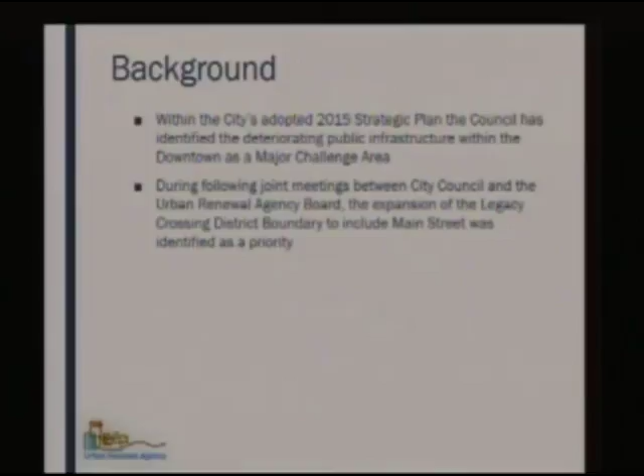After the adoption of that strategic plan in 2015, the council conducted two joint meetings with the Urban Renewal Agency Board of Directors or Board of Commissioners. In those joint meetings, expanding the Legacy Crossing District to include Main Street was identified as a priority for the agency to pursue.

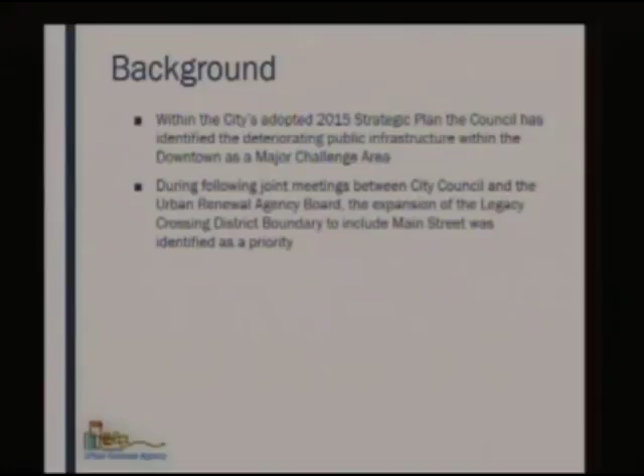Amending the boundary to expand and include that portion of Main Street in the downtown area would provide the opportunity for the agency to partner with the City of Moscow on future downtown streetscape and public infrastructure improvements.

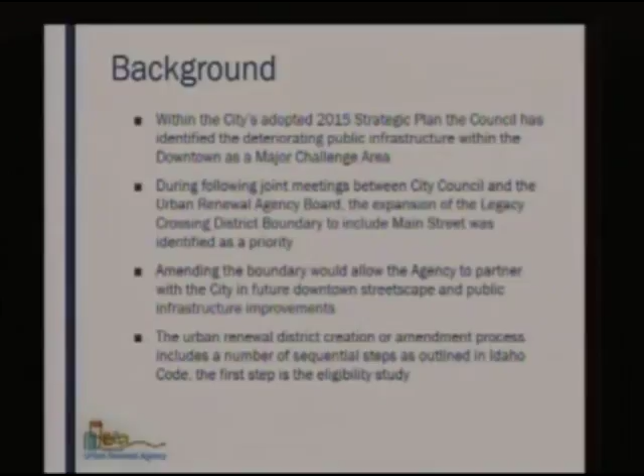The process of either creating or amending an urban renewal district includes a number of sequential steps. The first of those is completion of an eligibility study, which is what we're here this evening to discuss.

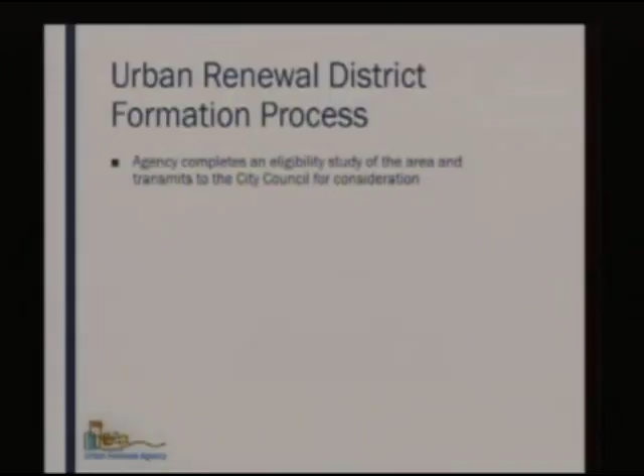As I mentioned, the formation process starts off with an eligibility study, and typically the Urban Renewal Agency, often responding to the direction or request of City Council, will complete the eligibility study for an area that the city is considering for an urban renewal project.

Once that eligibility study is complete, it would then be transmitted to the City Council, passed by resolution of the Board of the Urban Renewal Agency, then passed on for the Council's consideration.

The Council then considers the eligibility study, and if the Council concurs that the area meets the definition of a deteriorating area and is appropriate for an urban renewal project, the Council would approve the study and authorize creation of the district plan.

The agency then prepares the district plan, and when it's complete, approves the transmittal of that plan to the City Council by resolution of the agency for the Council's consideration.

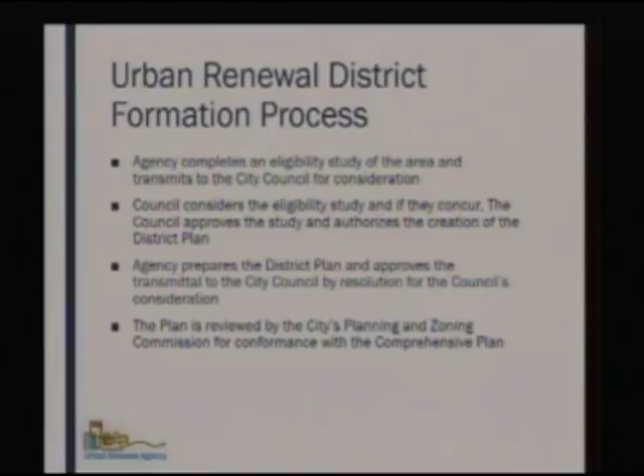Once the Council receives a plan or proposed amendment from the Urban Renewal Agency, the City Council refers it to the City's Planning and Zoning Commission, which is charged with reviewing the proposed plan or amendment for conformance with the City's adopted comprehensive plan.

Once the Council has received that recommendation, the City Council would consider the plan during a public hearing, and if approved, would approve it by ordinance, which formally creates the district and any associated tax revenue allocation area that may be associated with the project.

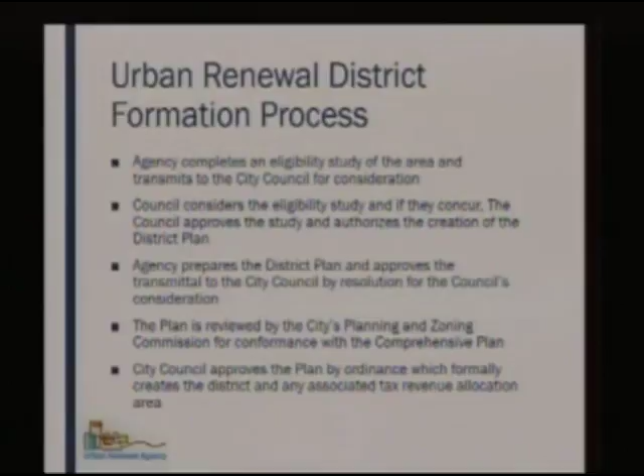So as I mentioned, this evening we are here looking at the very early stages of that process for amending Legacy with the eligibility study.

The study is intended to assess the project area to determine if conditions exist that would indicate the area is a deteriorated or deteriorating area. Those are two different but companion definitions in state statute, included in the appendix of the eligibility study you have this evening.

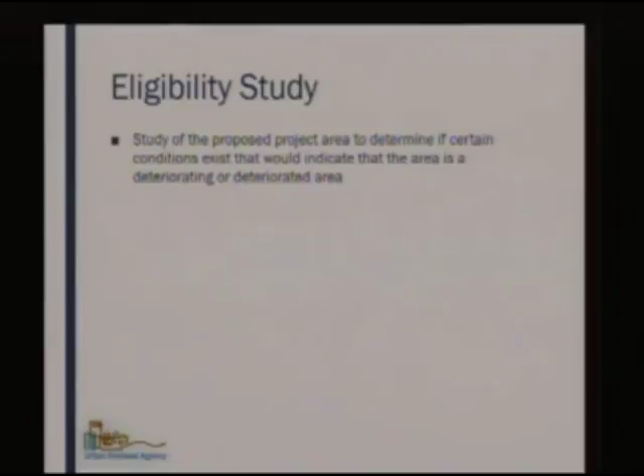Within those definitions, there are 10 specific criteria identified under Idaho Code, which assess the condition of both public and site improvements, structures, as well as other impediments to development—maybe street layout, lot configurations, or configurations of ownership that impede the development and redevelopment of a specific area.

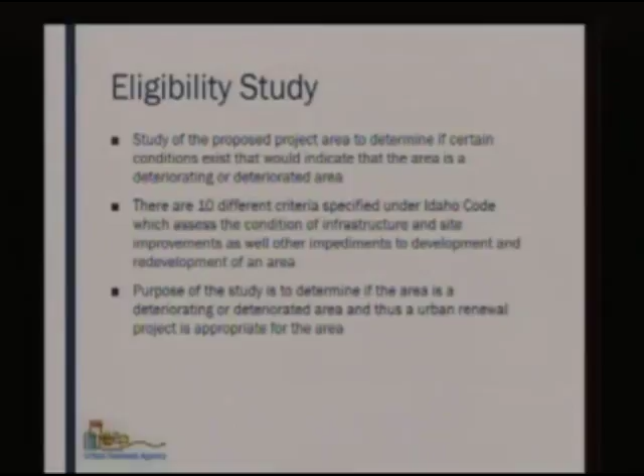As I mentioned before, the purpose is to determine whether the area meets the definition of a deteriorating or deteriorated area, and thus whether an urban renewal project is appropriate for that specific location within the community.

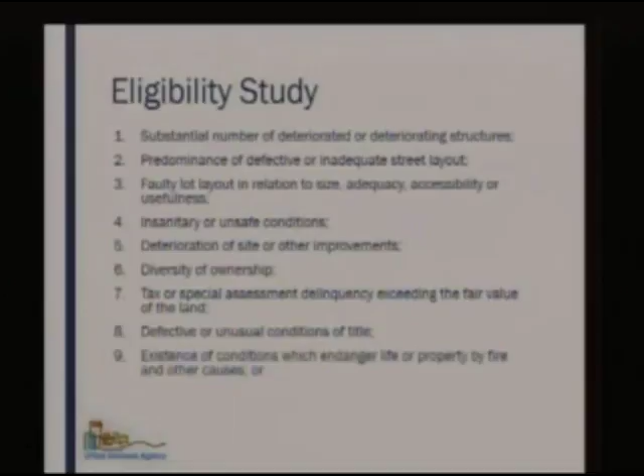So those 10 criteria start off with a substantial number of deteriorating or deteriorated structures, predominance of defective or inadequate street layout, a faulty lot layout in relation to size, adequacy, accessibility, or usefulness, insanitary or unsafe conditions, deterioration of site or other improvements, diversity of ownership, tax or special assessment delinquencies exceeding the fair value of the land that may inhibit development, defective or unusual conditions of title, existence of conditions which endanger life or property by fire or other causes, or finally, any combination of the foregoing nine criteria.

Now, this is really not a new eligibility study. This is an update to an eligibility study that was completed in 2007, but as that is over 10 years in age, we felt that it was appropriate and necessary for the agency to update that work.

The initial study was presented to the Urban Renewal Agency on August 7, 2007, completed by Harlan Mann. At that point in time, it was a much larger area under consideration. There were two areas identified within the eligibility study, Area A, shaded in blue, and Area B, the pink color.

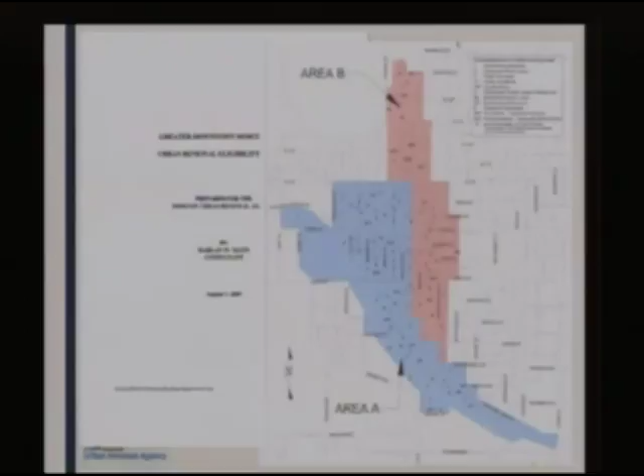This map indicates, and there's a key there you can't read at that scale, locations where those 10 different criteria conditions were present. That study was completed in 2007, so it has been over 10 years since. It did conclude that both Area A and Area B had characteristics indicating a deteriorating area eligible for an urban renewal project.

But this evening, we're just talking about a small, thin slice of Area B. Ultimately, when the district was formed in 2008, the boundary largely followed the Area A outline. So that portion of Main Street that exists, well, all of Main Street, is just outside the urban renewal district boundary. That boundary runs just down the alley located on the west side of Main Street. So really what we're focusing on this evening is an update to this eligibility study that just covers this particular narrow slice of the downtown core.

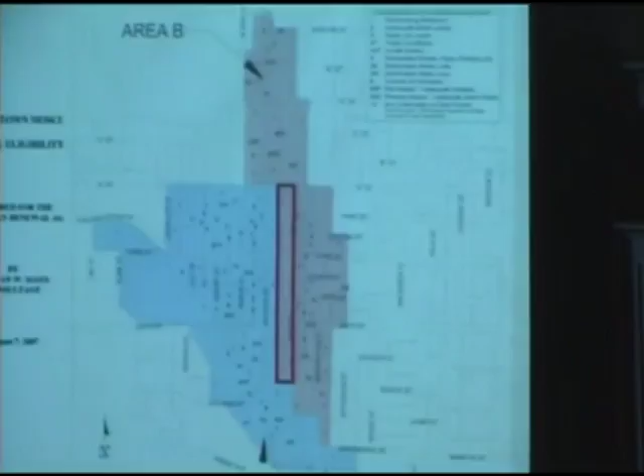So we'll walk through those individual criteria, the first of which was substantial number of deteriorated or deteriorating structures. As noted in the 2007 study, there have been a number of buildings that have undergone renovation and improvements, but there still remain many that have had deferred maintenance and limited investment in the time period.

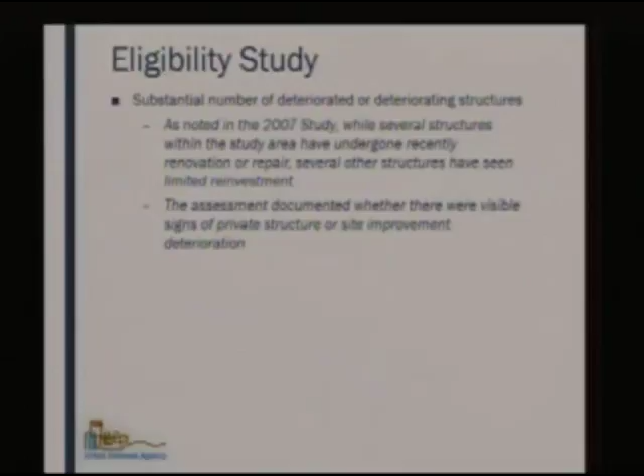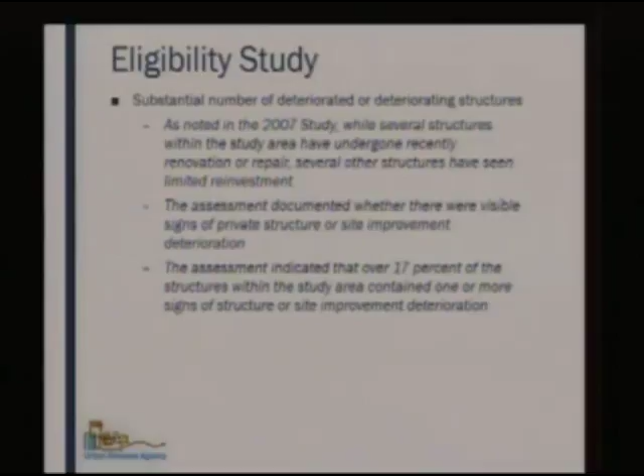We did conduct an assessment of the exterior appearance of those structures to identify any visible signs of private structure improvement or deterioration. The assessment indicated that over 17% of the structures within the assessment area contained one or more signs of deterioration, either of the building or of site improvements. And over 40% of the building facades were deemed to be outdated and not consistent with the National Historic District designation of the study area.

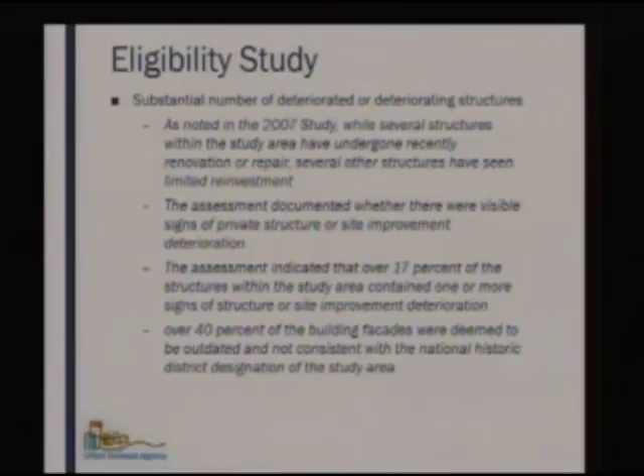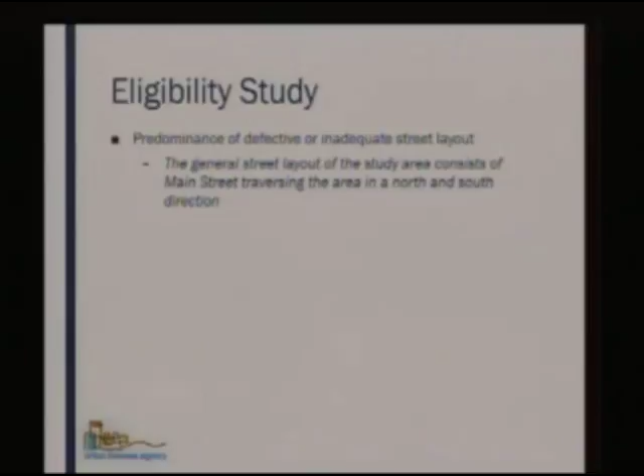A predominance of defective or inadequate street layout is criteria number 2. Generally, the street layout is consistent with what you'd see for a small urban area. Main Street traverses the north-south. Generally, the street layout is considered to be consistent and provides adequate access and circulation and is not to be considered defective or inadequate.

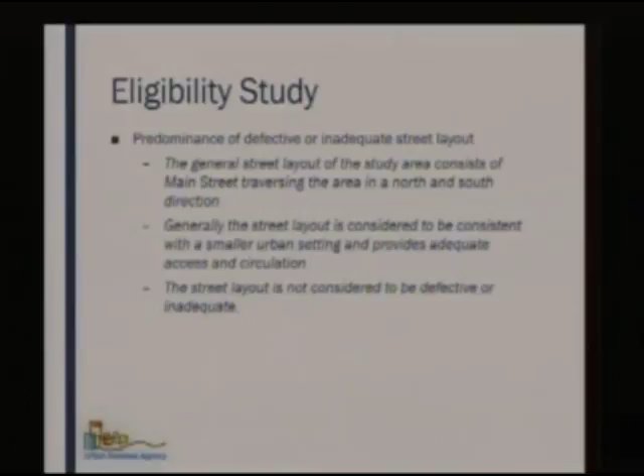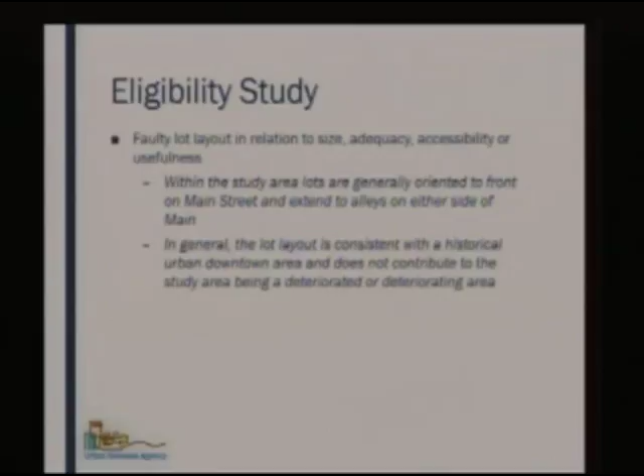The faulty lot layout or relation of size, adequacy, access, or usefulness—again, within the study area, the lots vary widely in size. All the lots studied as part of this eligibility study were located on the west side of Main Street, so they are generally oriented in the east-west orientation, fronting on Main Street with access to the alley to the west. Generally, lot layout is consistent with what you expect in a historical downtown area and does not contribute to the study area being a deteriorating or deteriorated area.

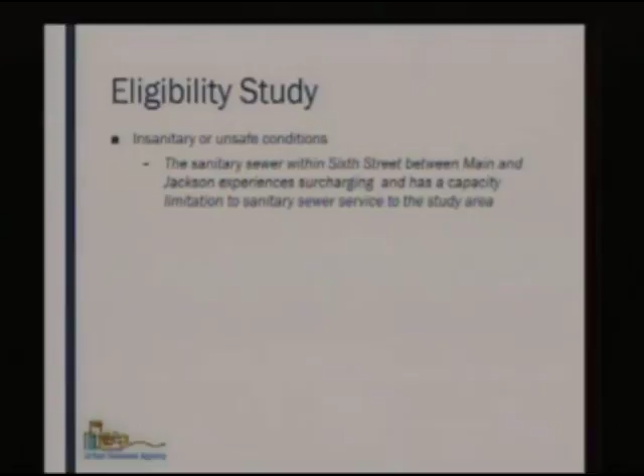When looking at insanitary or unsafe conditions, there are some capacity issues within the sanitary sewer main that exists in 6th Street between Main and Jackson. That's mostly due to pipe size and slope, but it does have some surcharging that happens in some manholes within that segment, which is limiting sewer service and presents a long-term maintenance issue and sanitary condition problems within that particular area.

There also are virtually no ADA compliant crosswalks within this area. As you know, many of the crosswalks that exist in downtown were installed as part of the 1981 LID with exposed concrete aggregate and do not have the tactile warning strips or meet grade requirements for current ADA standards. And so those do present safety hazards to those with sight impairments or mobility impairments within the downtown area.

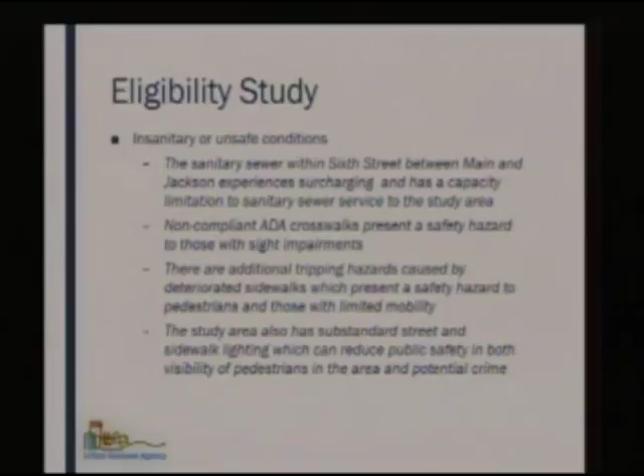There are also a number of differential settlements or lifting of sidewalks that present tripping hazards throughout the core, and those also present safety hazards to pedestrians and those with limited mobility. There's also fairly significant substandard lighting in the downtown core, which can reduce public safety, perceived or real, and visibility of pedestrians.

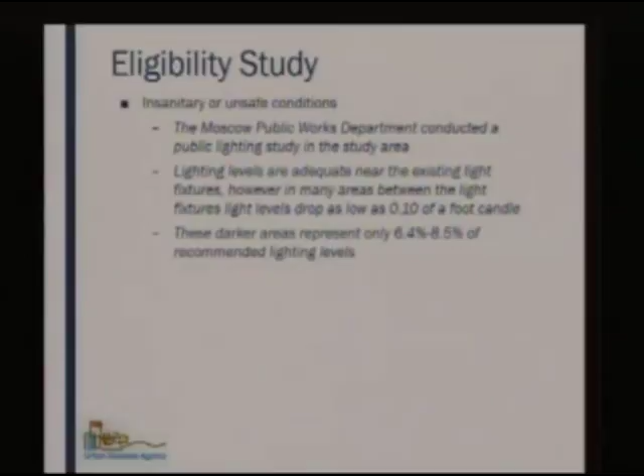The Moscow Public Works Department conducted a public lighting study of the area and found lighting levels are adequate near existing fixtures, but many are spaced too far apart or obstructed by the tree canopy. Light levels dropped as low as 1/10 of a foot candle between fixtures, representing about 6.4% to 8.5% of recommended lighting levels, well below what's desired for street and sidewalk lighting downtown.

So there is large variability in lighting, with very bright spots as well as very dark spots between fixtures, which creates difficulty for the human eye to adjust as both pedestrians and motorists traverse the corridor.

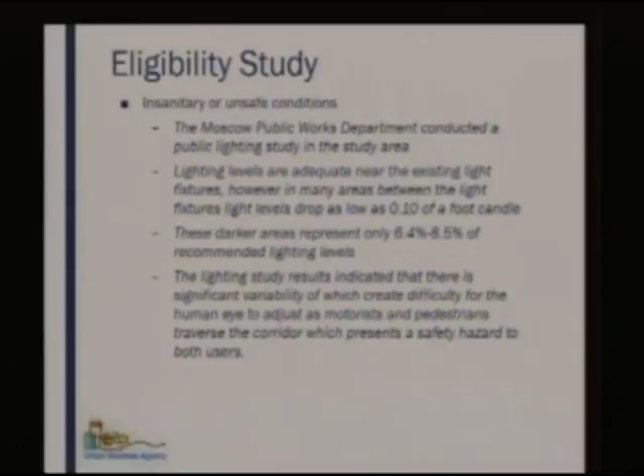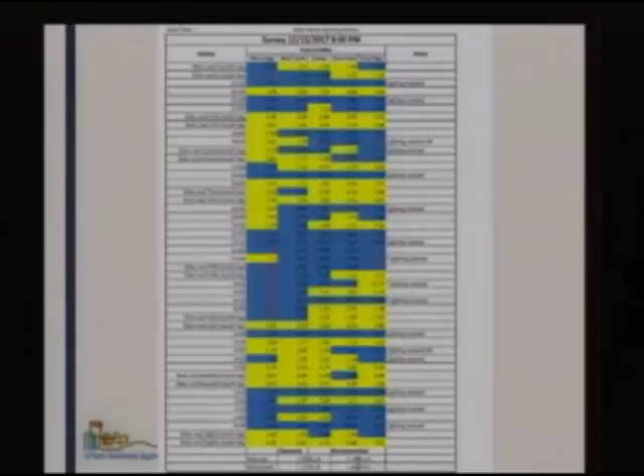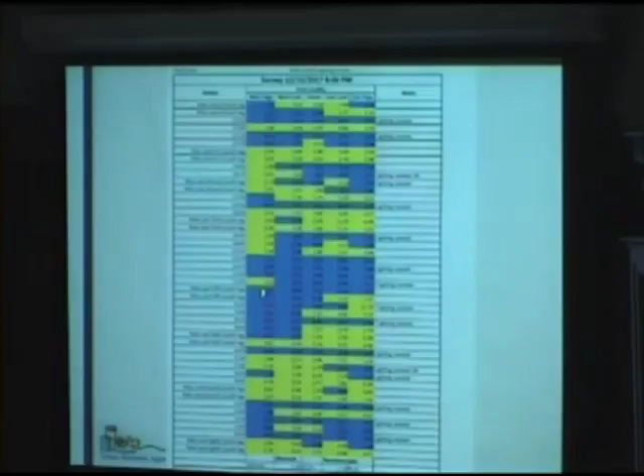This was just an example, included in the appendix of the eligibility study. You can see the light areas shown starting at the north end of Main Street heading south, with the street center line, sidewalks on either side, and curb lines in between. The darker areas show lighting well below standard, while yellow areas indicate adequate lighting.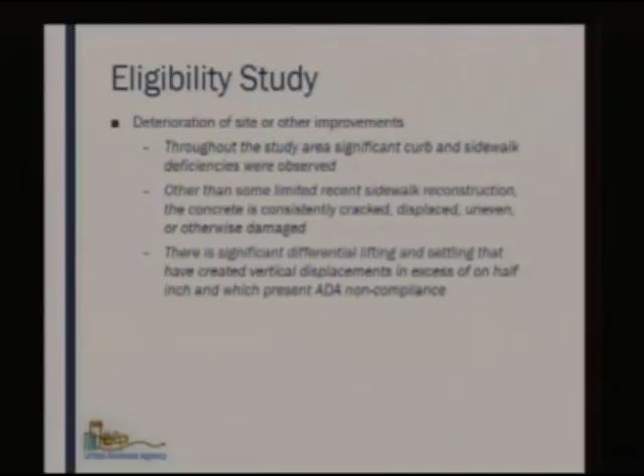The deterioration of site or other improvements was the predominant condition identified in both the 2007 study and this update. Throughout the study area there are significant curb and sidewalk deficiencies and roadway deterioration. Other than some limited sidewalk reconstruction, much of the concrete is old, cracking, displaced, uneven, or otherwise damaged. There is significant differential lifting and settling creating displacements in excess of a half inch.

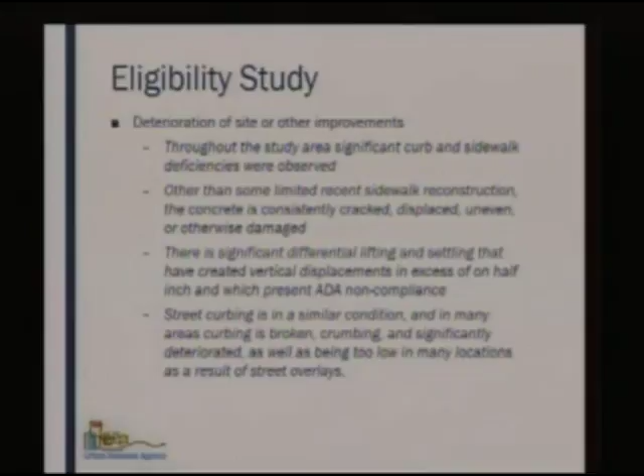That is considered an ADA non-compliant condition. Street curbing is in a similar condition—in many areas it's missing, broken, or deteriorating after almost 40 years of maintenance and snow plowing. In many areas it's also too low to adequately control drainage because of street overlays that have occurred over time. None of the pedestrian ramps within the study area are compliant with current ADA standards.

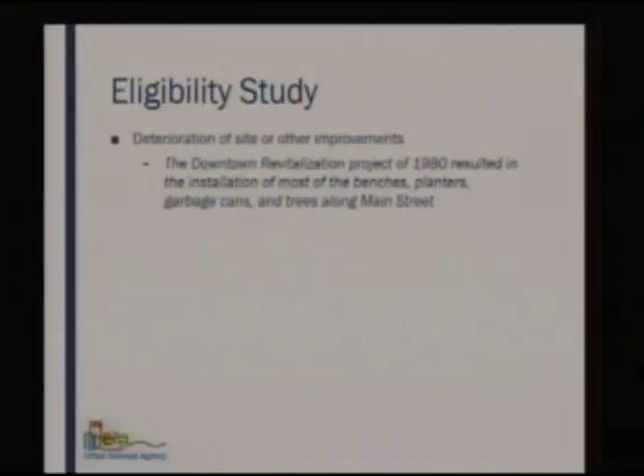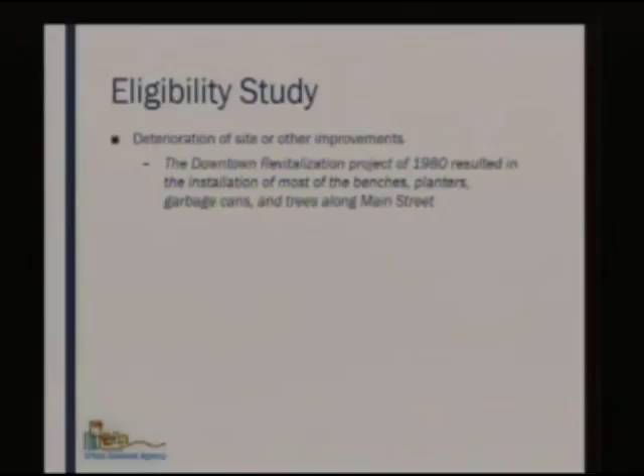The downtown revitalization project done in 1980 and 81 also resulted in installation of many benches, planters, and garbage/trash receptacles along Main Street, and many of those are in very poor and deteriorating condition as well. There have been some street surface maintenance projects that have occurred.

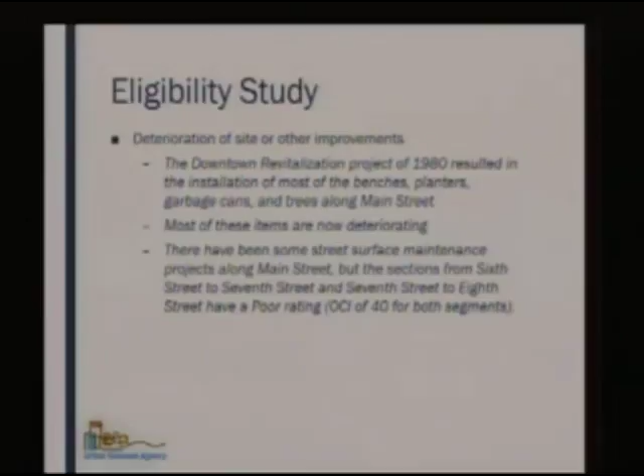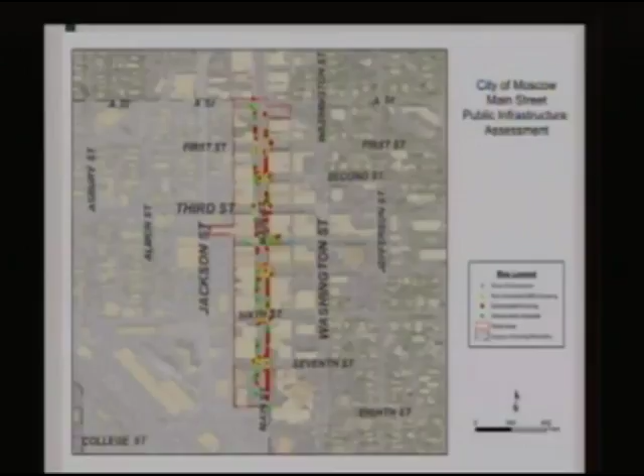Main Street received most of the maintenance between 6th Street and up to about 2nd Street. But sections from 6th to 7th and 7th to 8th have a very poor asphalt condition rating of 40 or below. There's also a portion of 4th Street east of Friendship Square that has a fairly low condition rating. This detailed map included in the study shows the areas of deficient infrastructure identified.

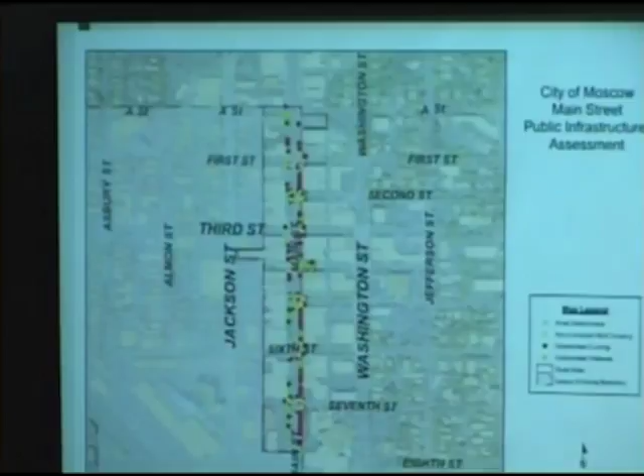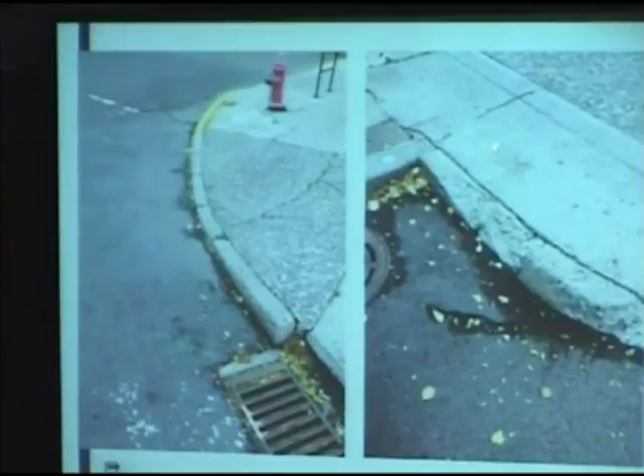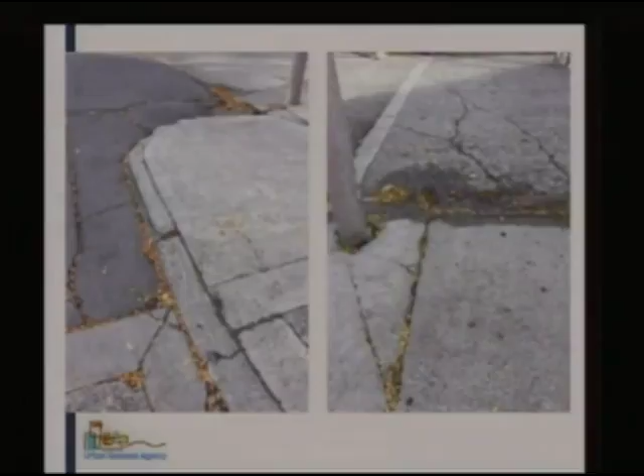These are just a few photographs showing the condition of that hardscape, with missing curb, cracking, deteriorated curbing and sidewalks, and non-compliant ramps throughout the downtown area. It is definitely showing its age at this point, 40 years after that major renovation work downtown.

Diversity of ownership was one factor considered. It is diverse in the downtown core, but that was not identified as something contributing to inhibiting growth or development in the area.

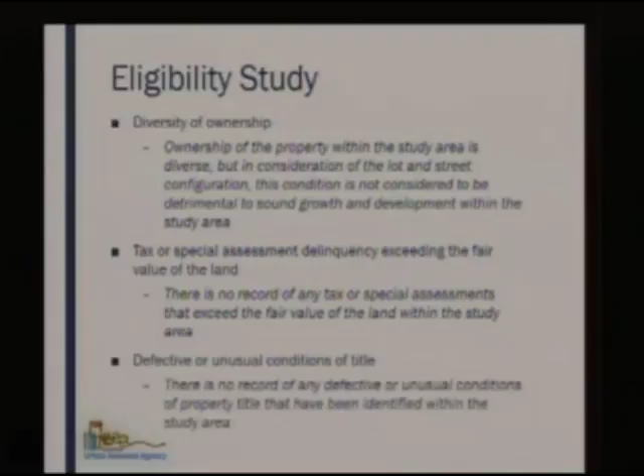Tax or special assessment delinquencies—there were none identified on record that we were aware of, so that does not appear to be an issue in the area. As for defective or unusual conditions of title, there was no record of any that would contribute to a deteriorating area.

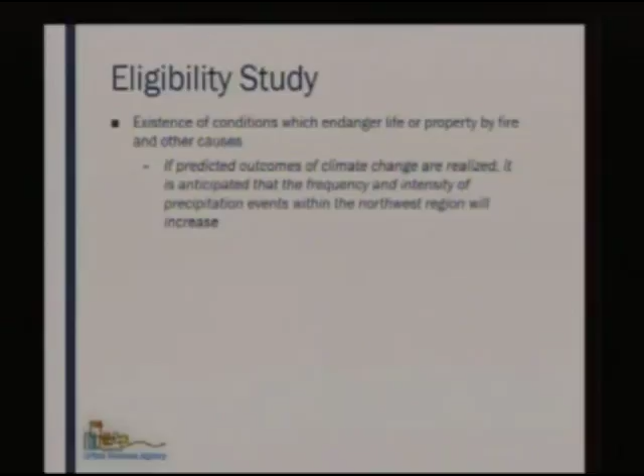Existence of conditions would endanger life or property by fire or other causes. It's noted in the study that if predicted outcomes of climate change are realized and we have more frequent intense rainfall events, we will anticipate seeing increased stormwater events impacting the study area.

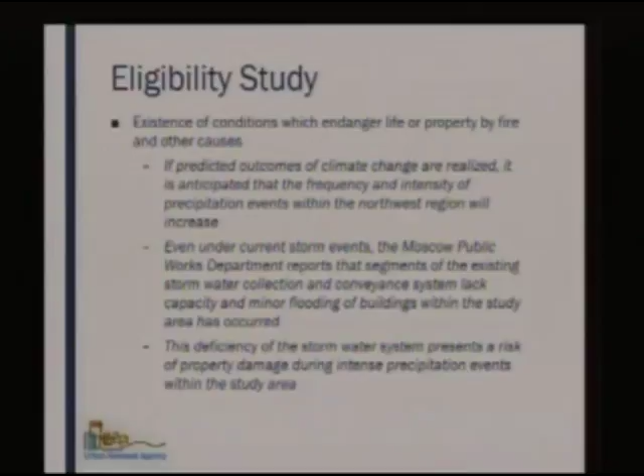Even under current storm events, the main storm line that extends from downtown east or west to the creek in 6th Street has significant capacity limitations, and even minor flooding occurs today with significant rainfall events. So repairing curbing, adding catch basins, and increasing the storage capacity of that storm main system would help address that condition in downtown, which does present a risk of property damage during those intense precipitation events.

In conclusion, looking at the overall study area against the 10 identified criteria, as was concluded in 2007, we find there is significant deterioration of the public infrastructure documented by the study that constitutes an economic and social liability by inhibiting access by persons with disabilities, normalizing and perpetuating site and building deterioration, and discouraging private investment, and by presenting a risk to persons or property within the study area.

So we feel this does substantially impair or arrest the sound growth of the city and would be considered a deteriorating or deteriorated area. So the consideration for the council this evening: the Moscow Urban Renewal Agency reviewed this at their

meeting on March 1st, 2008, and approved the eligibility study and the transmittal of it to the City Council at their meeting at that time. If the council concurs with the conclusions of the study, the council can approve the study and pass the associated resolution to authorize the Moscow Urban Renewal Agency to prepare the plan amendment for the council's consideration.

And with that, I'd be happy to try to answer any questions you may have. Questions for Bill?

Yeah, I think this is a program we should begin to undertake and begin the studies. It's not going to happen overnight. It'll take some while to get done, by way of developing the plans, as well as getting some more tax increment into the URA to be used for this. But getting it started means the wheels are turning, and we can get further towards revitalizing the Main Street hardscapes much sooner than if we did nothing. So I'm very heartily in support of this whole project.